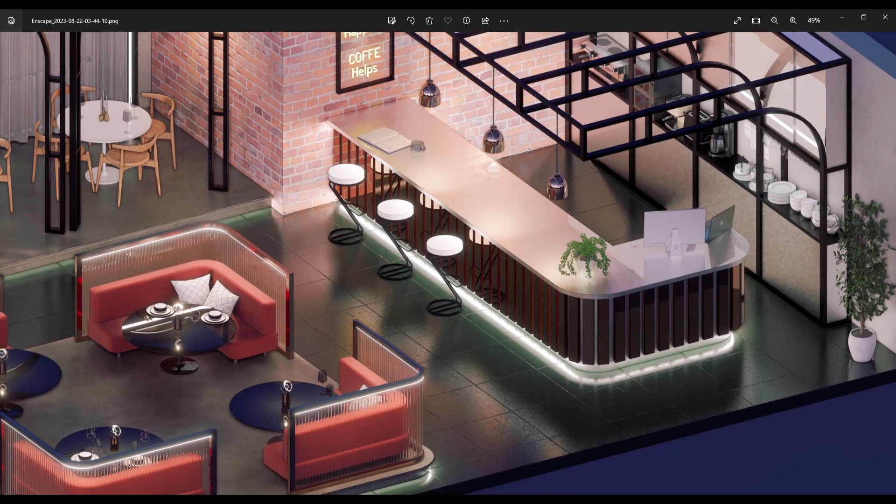The last tutorial was all about the modeling of this scene, and we created every detail, every part from scratch to this. Actually, I added some families and objects, and I'm going to give a quick update about them.

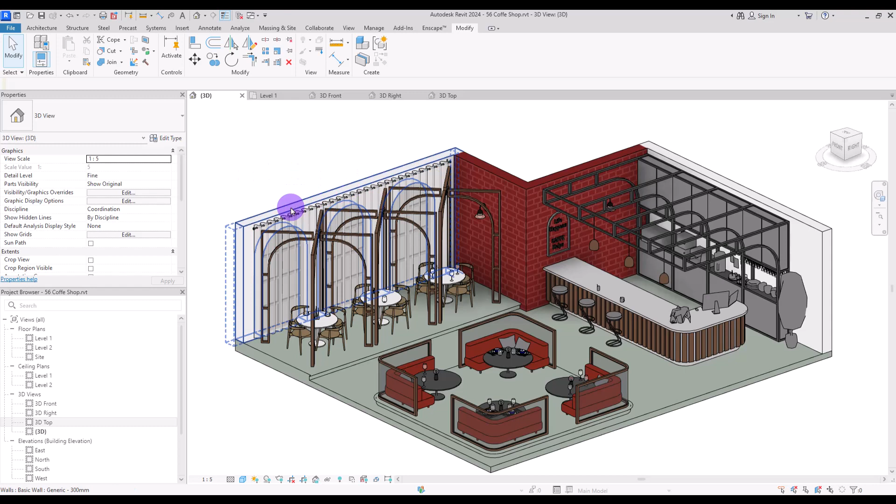First I added this curtain. I modeled it with a simple generic model and sweep blend, using a start and radius for all these parts. After that I created a void extrusion with a circle on top, and then with a revolve I created this rod.

Let's go to section box first. As you can see, I added these parts because I thought it was a little simple, and also I wanted it to match the frames in the bar section.

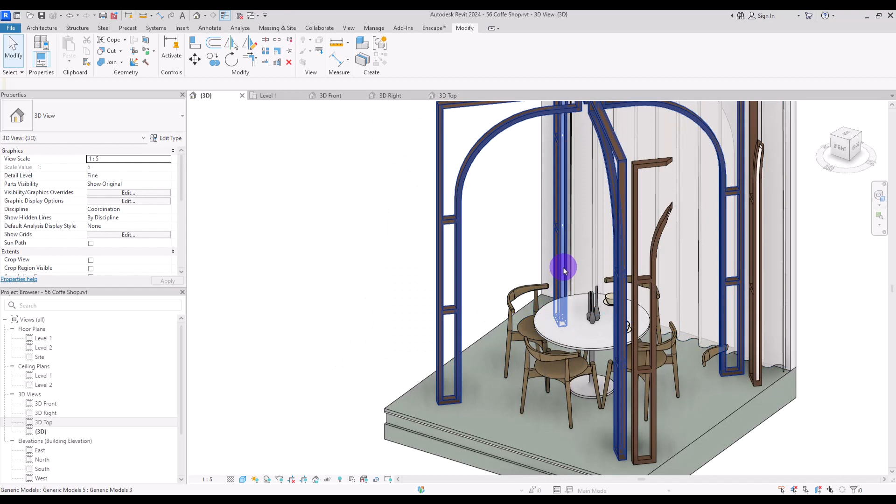I also added these lightings in this part. I created a void inside this part and then turned it into another geometry and added a lighting material. Nothing more in this part.

I just changed these chairs and added some dishes and glasses here.

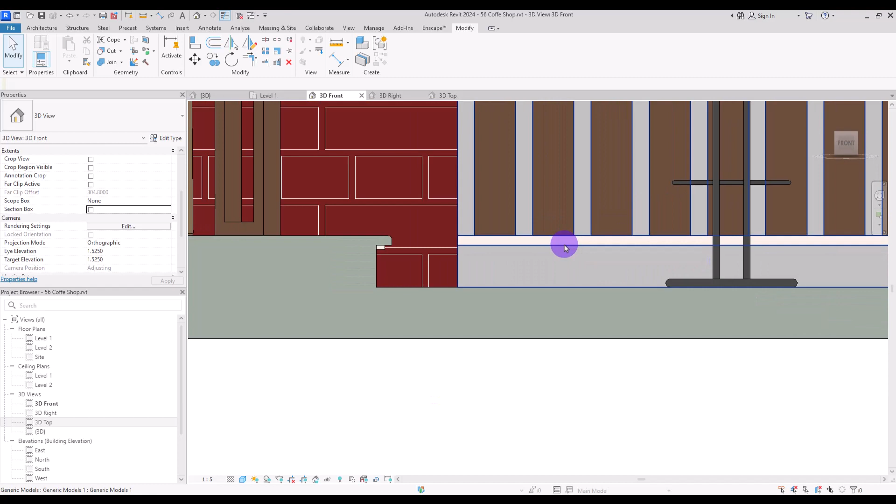If we look at this front view, you can see I added a nosing and lighting to this part with a very simple extrusion, and also for this part around this lounge, on the interior side of this partition, I added a very simple shape like this.

I actually copied this part onto itself and then turned it into a material. So if you select this, you can see this frame panel and this lighting here.

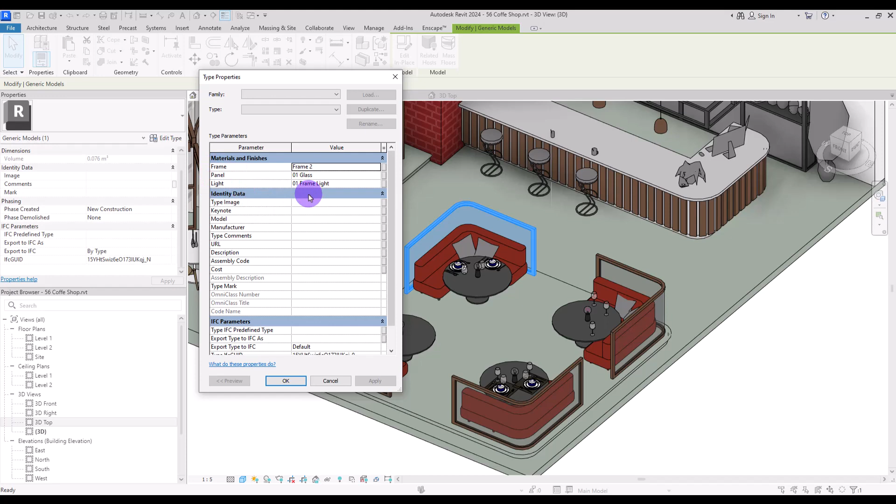We also have lights under this counter, and also under this part's top board, also under this frame here, and also under this part.

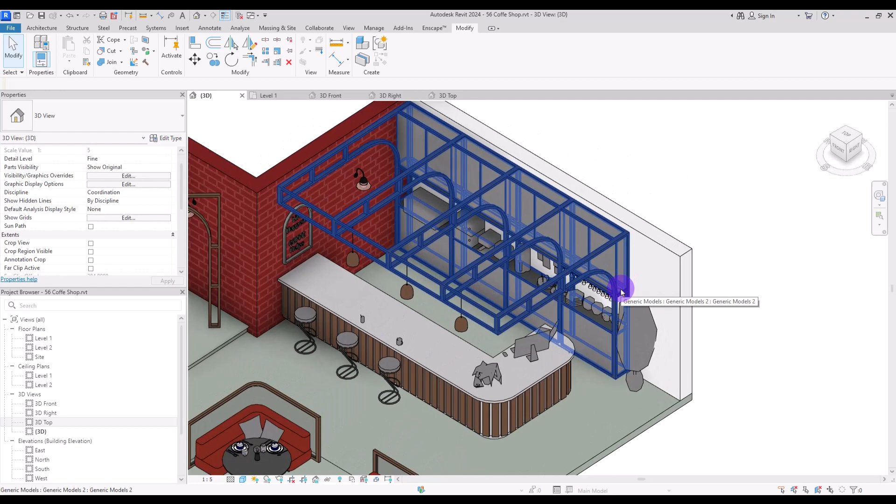I created some cabinets in these parts too, just to hide some space for things like dishes and equipment. All of these objects and families make our place a little bit messy, so I don't want it to be more than this. These are also too much.

This part is also new. I modeled this arch again with a generic model, and this part is a text. If you go to the architecture tab, you can model any text that you want with this model text tool.

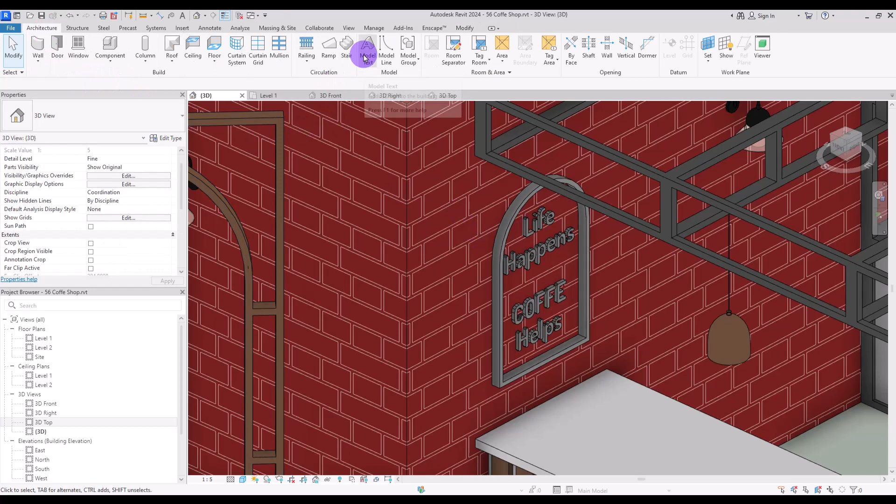These lightings are also new. I modeled them very quickly as lighting fixture families. If you want to learn more about creating lighting families, you can watch this video in the top right corner.

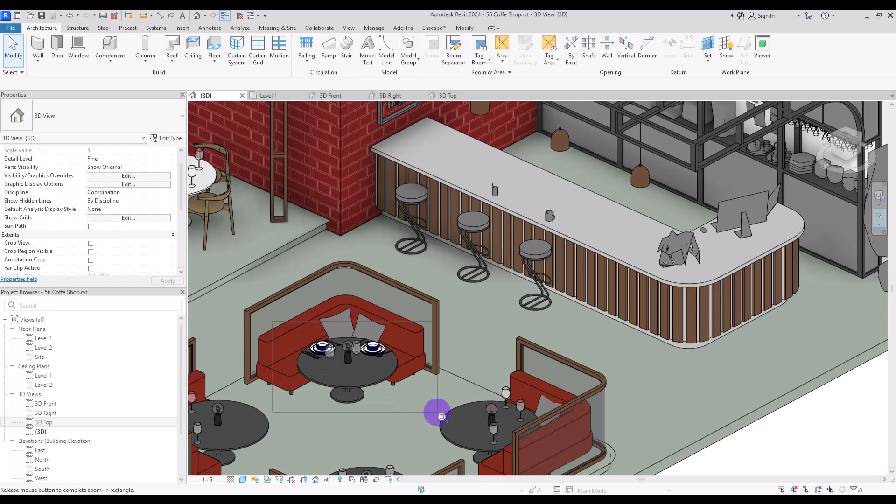If you select them, you can scroll down in this part and add whatever you want. You can add a placement fabric like this, and if you don't want these glasses, you can select another one. If you want, you can add a candle, and also hide this all and turn it into a wine glass simply.

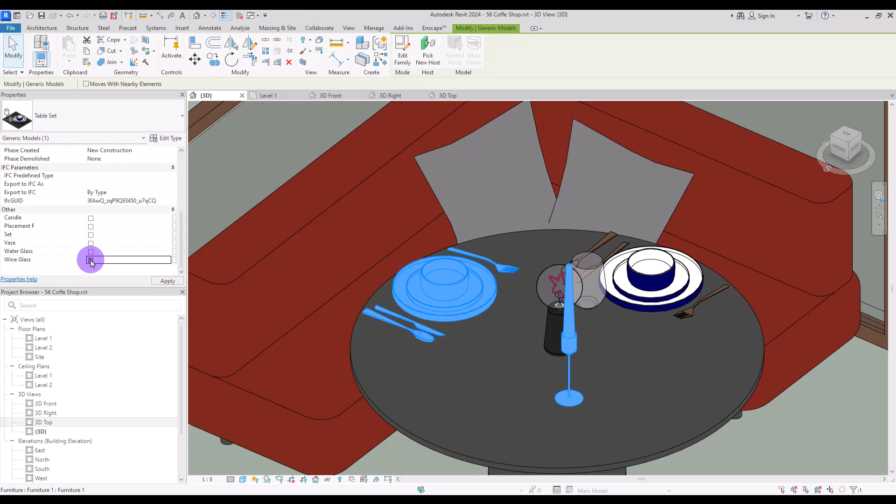Any other object or family that you see is for Enscape. So if you go to this tab and its asset library, you can select anything that you want.

You can also go to bimobject.com and search for whatever family or object you want, download them, and use them in your project.

Before we go back to Revit, let me show you ambientcg.com, where I download all of my textures from. If you go to all categories here, you can see every different type of material you need, so I download my textures from here.

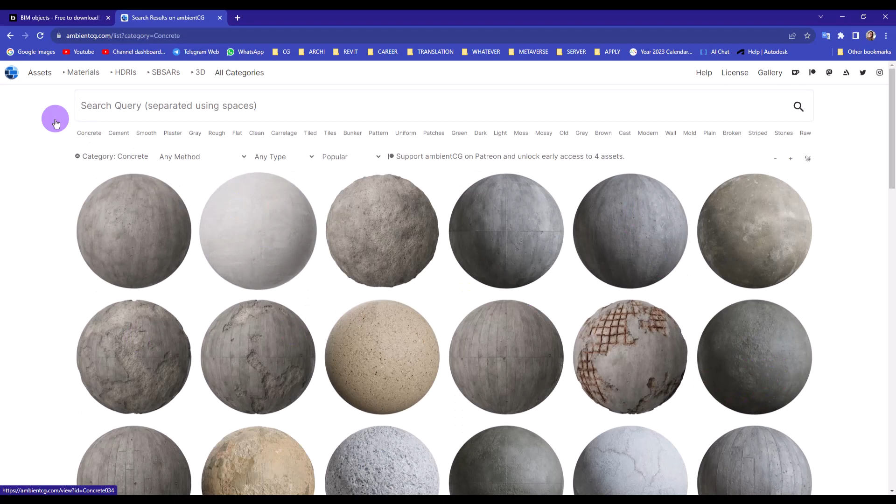For example, the brick I'm going to use is this one. The concrete I'm going to use is this one, or you can use this one or this if you want. Now let's go back to Revit and start with Enscape.

Okay, since this scene is going to be an isometric view like this and we didn't add any roof or ceiling for it, it's hard to work on it like this.

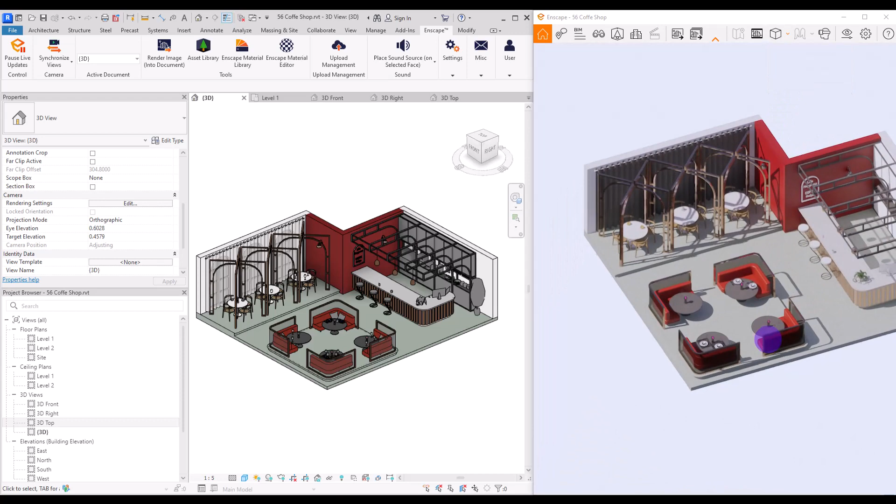First, we are going to change its view to this orthographic, and I also want to change it to night view, something like this.

Right now we don't have any sun or lighting in this environment, but we see these parts in white and it's a little bit unrealistic.

So if you want to fix it, you can go to your first level and add a floor, a generic model, or anything you want under your floor, and make it very large so it covers all of these parts.

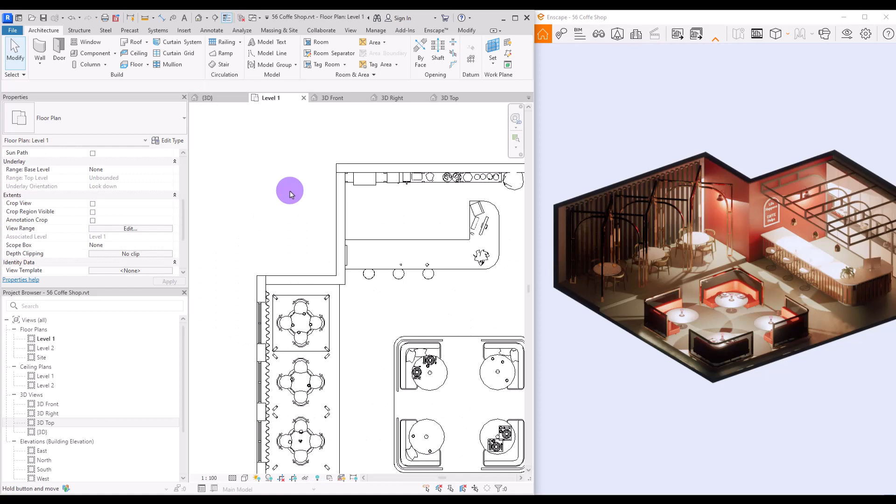Cool, now let's move on to the material part. As I said, lighting plays a very important role when it comes to creating material. It affects everything—its color, its bumps and displacements, and also its reflection.

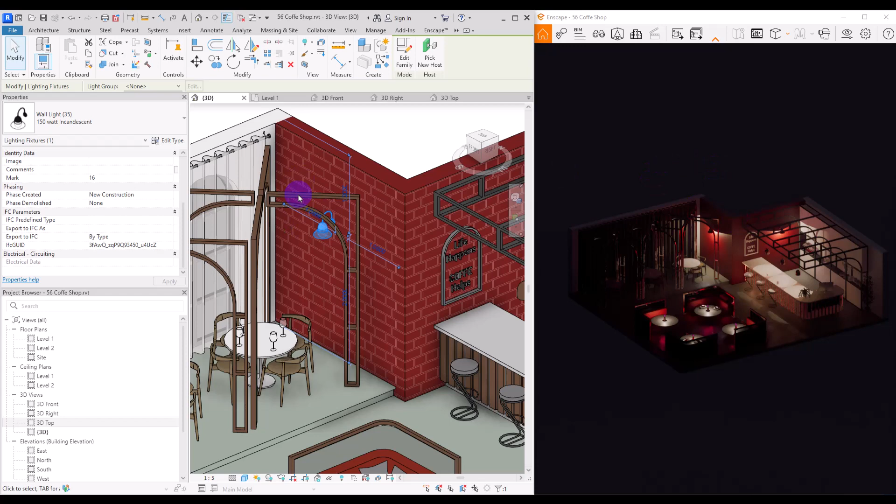So let's first control the lighting. For all of those lightings that I added to all of these frames under this part, under the counter and to this partition, I created one material.

So if you select them, you can go to its edit type, and it's this frame light. For this part also we have the same one. Again, it's the same for this part and also for this part.

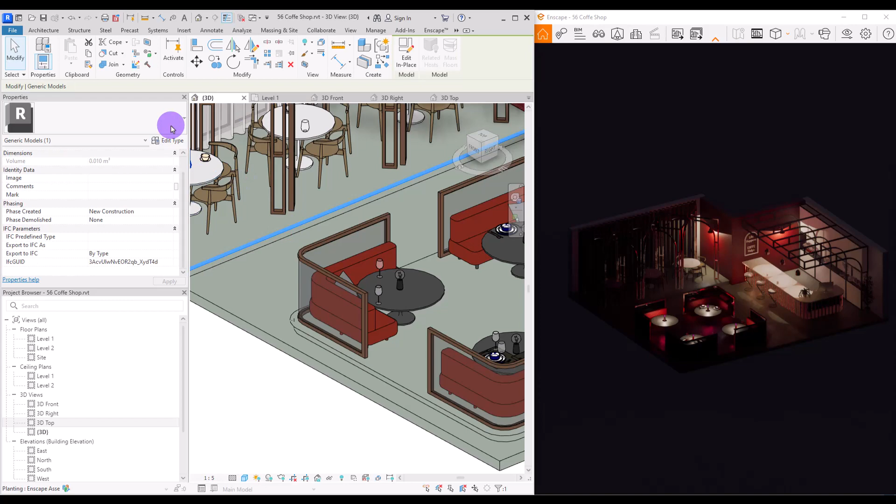So I'm going to go to manage and material. If you select it, you can go to this browser, and if you scroll down a little bit, you will find these lightings. You can select either one of them. Now go to its appearance, and here you can change its color if you want. You can change its emission and also its highlight from this part. For now, let's see how it will look.

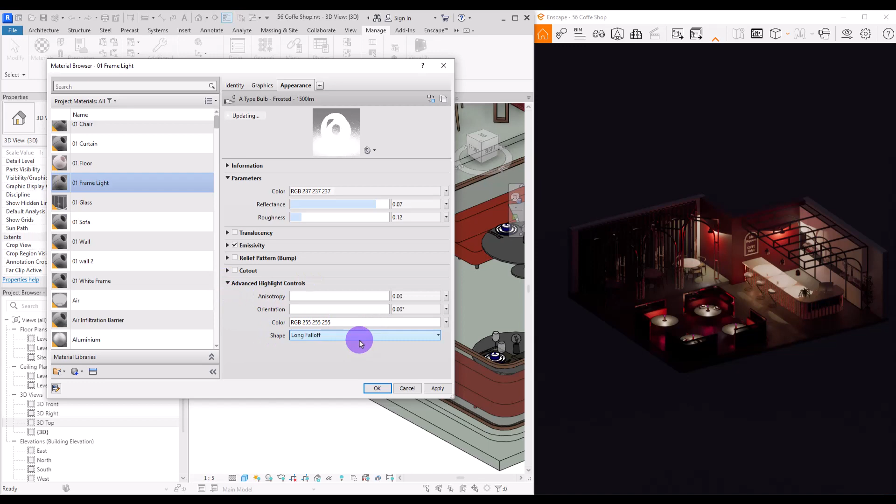It is too much. Let's go back there and decrease this luminance. I'm going to put it on 200. Okay, let's go with this one.

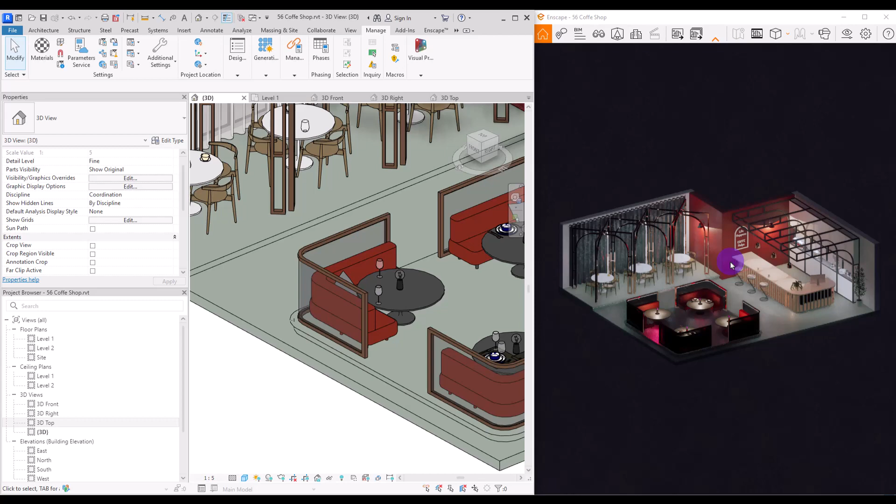In this scene, as you can see, it's a bit messy, so we need to be careful with our material. We should control the texture so we don't make it worse. I'm going to use only 2 textures for pattern, and even 2 is too much, so we need to use that texture carefully. I'm going to use one of them for this brick wall here.

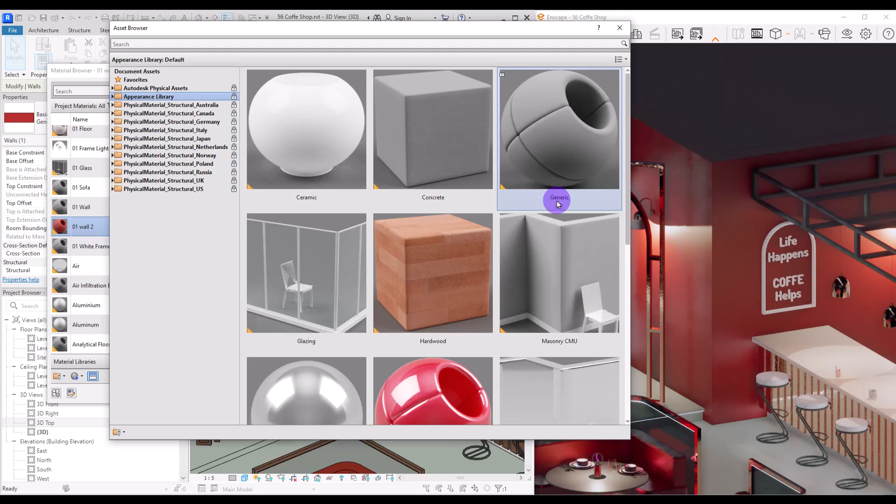Select the wall and go to its edit type. Go to edit, and in this part you can change its material. Let me first change it to a generic material like this, with no color and nothing else.

Now the first thing we need to do is add our image. Click on this part and select it. I'm going to use brick number 77, and for its color we need to use this color texture. In its setting, I'm going to change its size to 1:2.

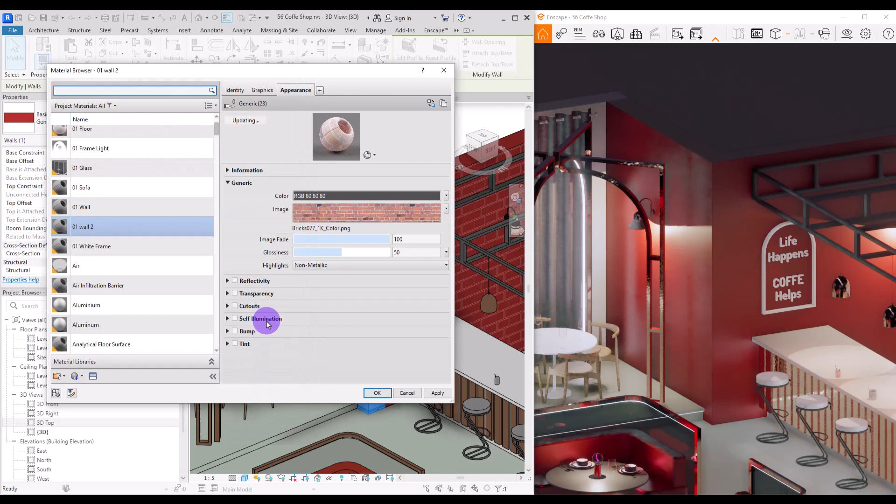It's good, I think it's good, but I want it to be a little bit more, so I'm going to change it to 3:1.5. I also want it to be a little bit darker.

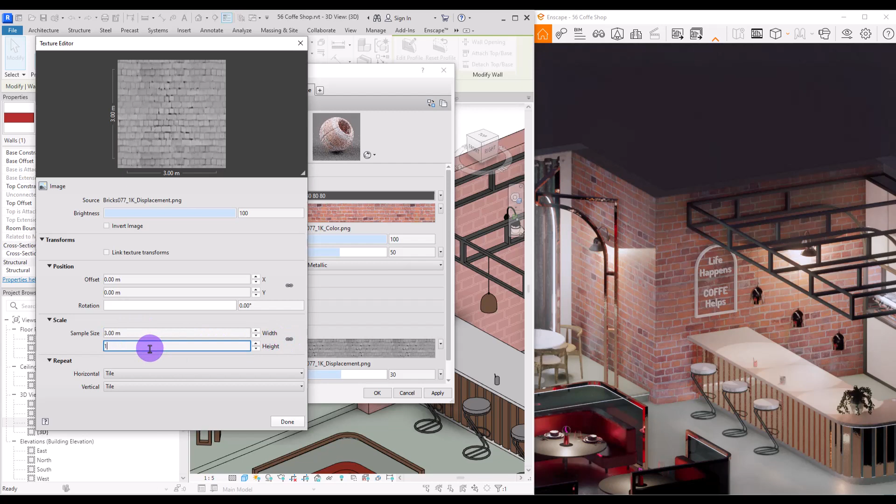Check this bump and add the bump or displacement texture. It's this one, and in this texture editor setting, you need to give it the same size, 3:1.5, and increase its amount from this part.

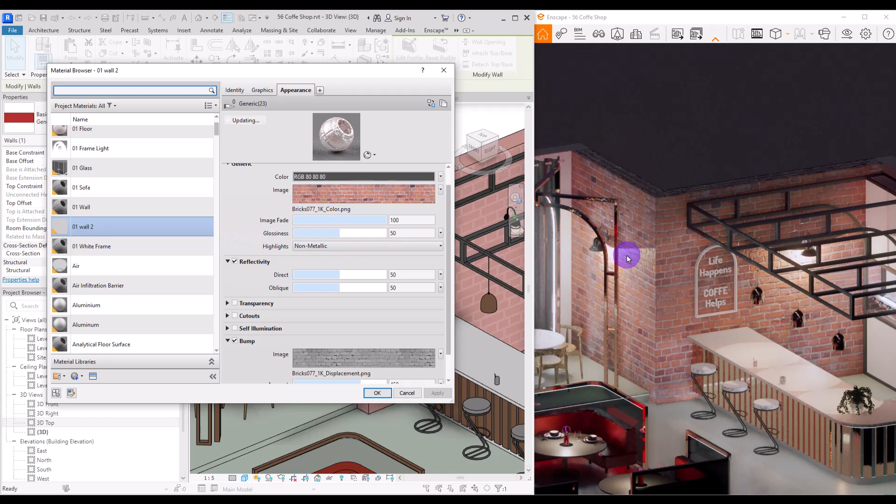I'm going to check this reflectivity too, to add a little bit of reflection. Brick is a material that needs no reflection, and actually it has no reflection, but in the real world we don't have any material with no reflection. Even if it's very low, you need to check it. If you want it to be less than this, you need to decrease this glossiness, and you see its effect here. I think it's good enough for now.

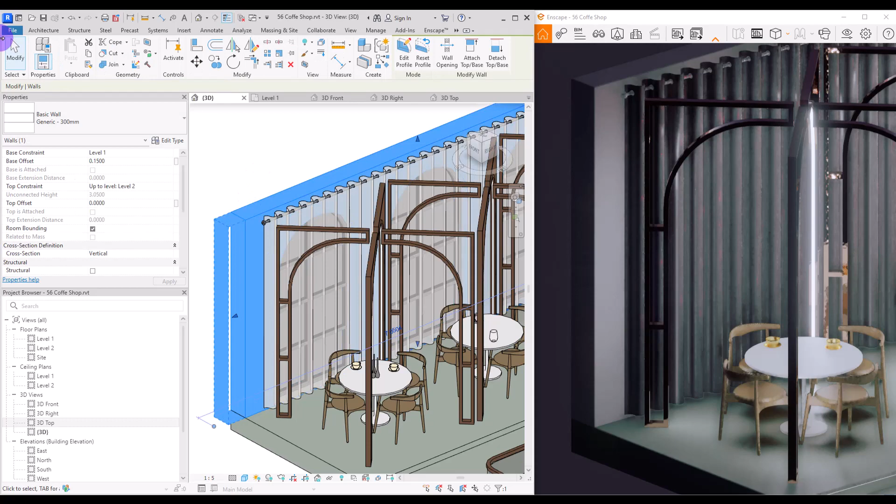The next material is going to be our wall in this part and also in this part. So you can go with plaster or concrete. I'm going to go with the second one. Select your wall and go to its edit type. Go to edit, and this is our wall number 1. The brick was wall 2, and this is wall number 1, or actually it has no number.

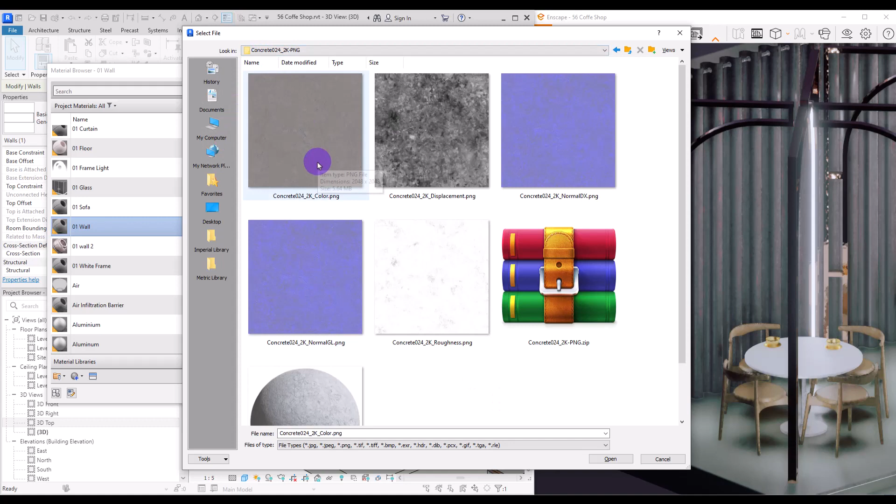So first I'm going to assign a default material for it, and then select its texture. It's concrete number 24, and for its main texture we need to select this color one. If it's too much, you can change it in Photoshop and then use it here. You can also change this color to something white, something like this, and then decrease this number so they mix together and give you something lighter.

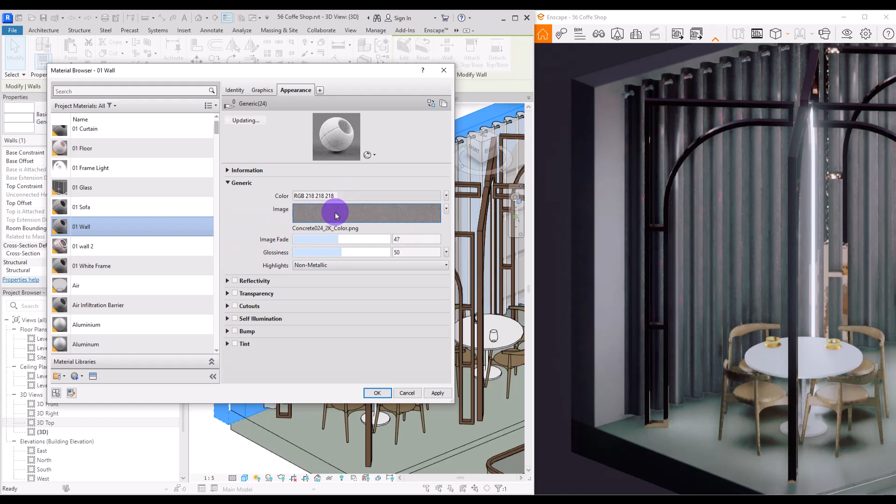In its setting, I'm going to change it to 2 for both of them, and let's apply and see how it looks first. I'm going to increase this number a little bit more, to 6. I think it's better; we can see at least these textures here, and then I'm going to give this bump texture for it.

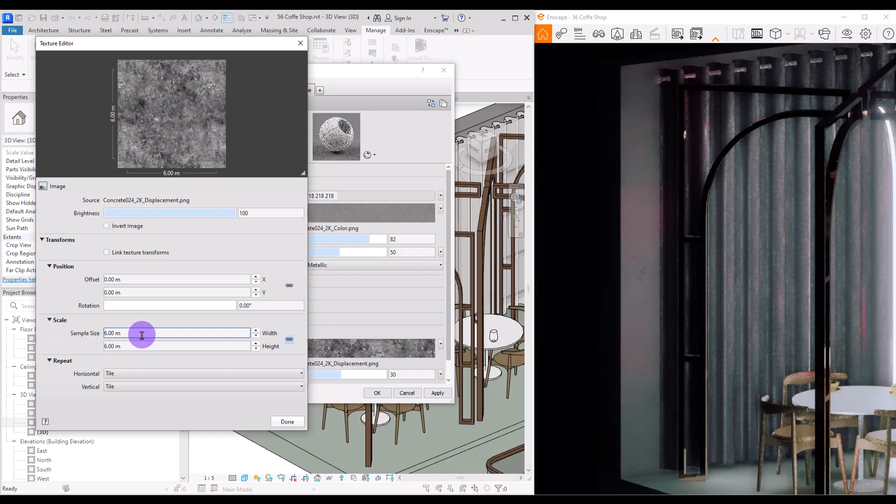We need to select this displacement, and in its setting we need to insert the same number for its size. Let's change its amount to 15. I also want to check this reflectivity and increase its glossiness so we have a little bit more reflection than this brick. The next material we are going to work on is the floor.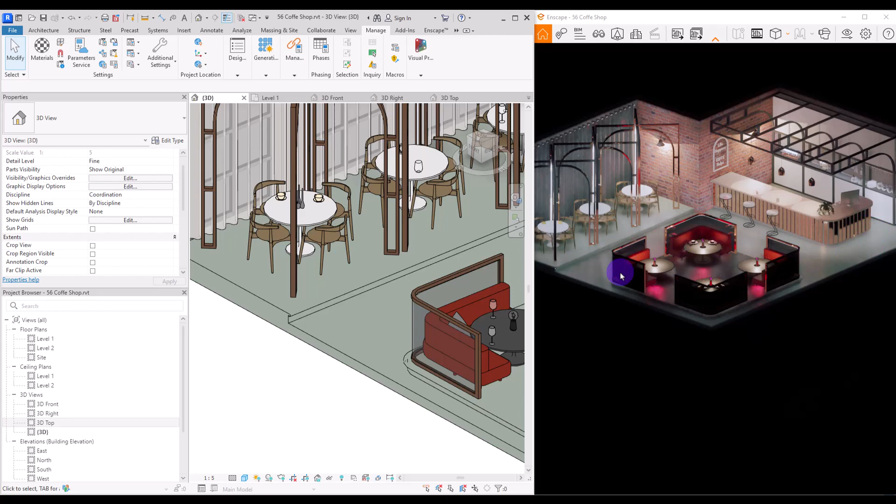I'm going to divide the floor into two different materials. For example, we can use one material for this part and another one for this part and also here. Since they are both the same type, we need to select it and go to its edit type. In here, we are going to duplicate it and change its name if you want, then go to its edit type, select its material, and let's simply create a new one.

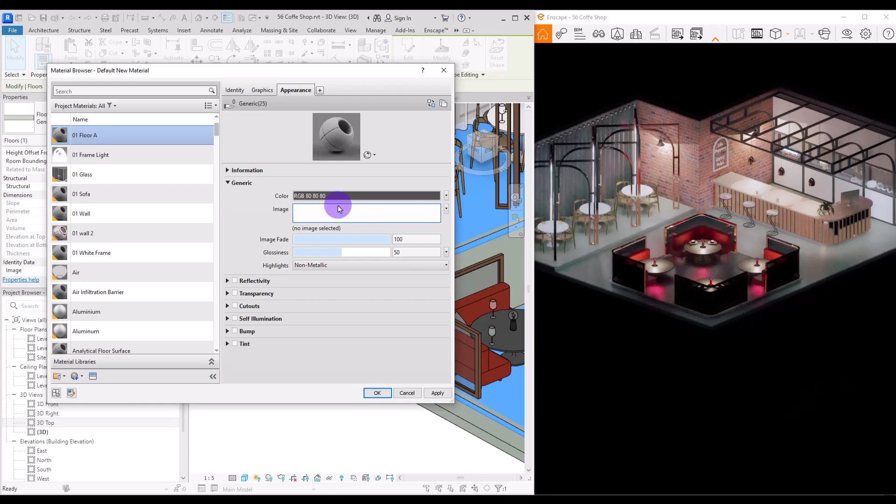Change its name to, for example, floor A. I don't want this part to have that much texture and so much reflection. You can use marble or concrete simply for this part, but I'm going to again use concrete number 32. Select this one for its color. In its setting, I'm going to change its size to 4, and let's apply.

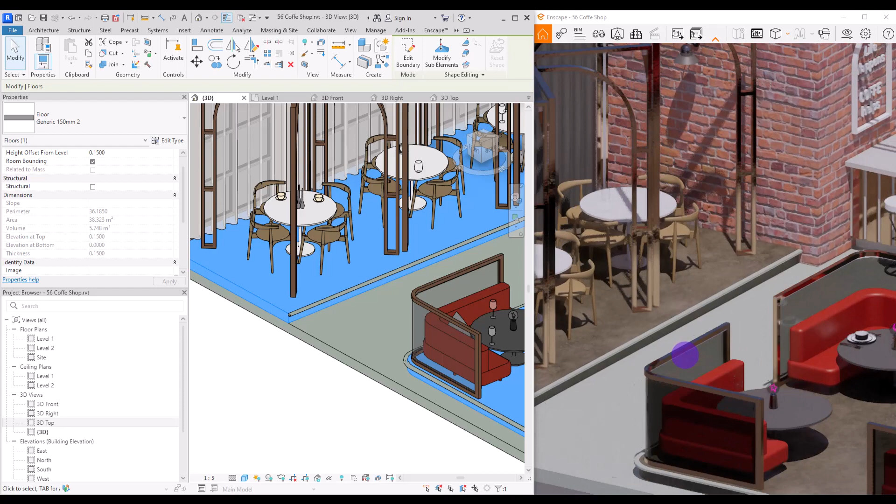If you look at it under the sun, it's something like this in this part and also here, and I think it looks good. However, I'm going to make it a little bit lighter. So change this color to something like this, and decrease this image fade.

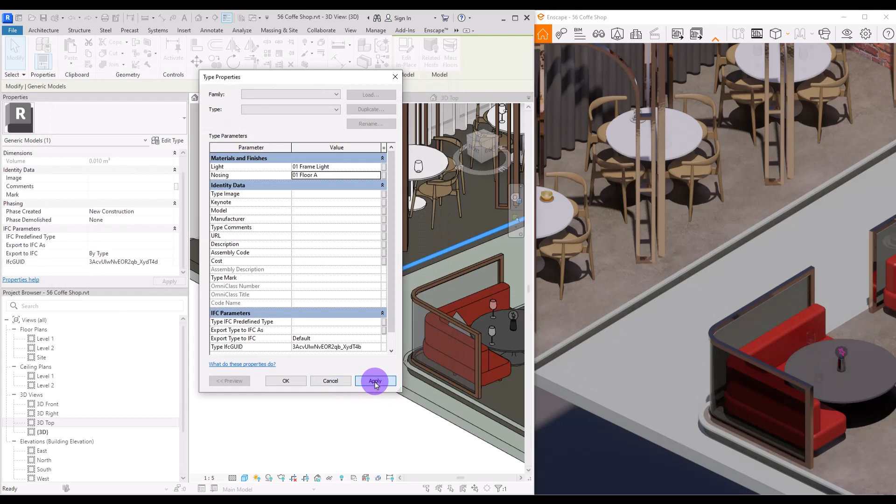For this part and also this part, we're going to use the same material. I'm going to click on this generic model, and in its edit type for this nosing, I'm going to select this floor A. Now it's time for the other floor.

Let's select it and go to its edit type. First we are going to assign a texture for it. I want to add the second textures material for this floor. I think it will be cool if we make it very reflective, since we don't have that much reflect in this scene.

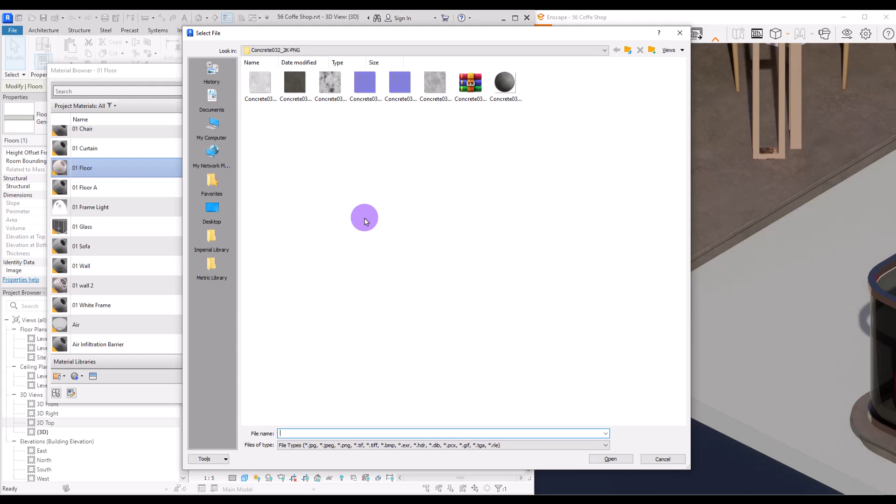It is this one. You can find it in Arroway textures in the concrete section. For now, I want to change its size to 4.

As I said, I want it to be very reflective, so I'm going to check this box and increase its glossiness. Also we need to check this bump and add its bump texture, which is this one. Increase its amount too, and let's apply.

Oh, it's too much. Okay, 1.5 it is, and I also want to change its color to that darker one, this one. Another thing that I want for this material is for it to be a little bit green.

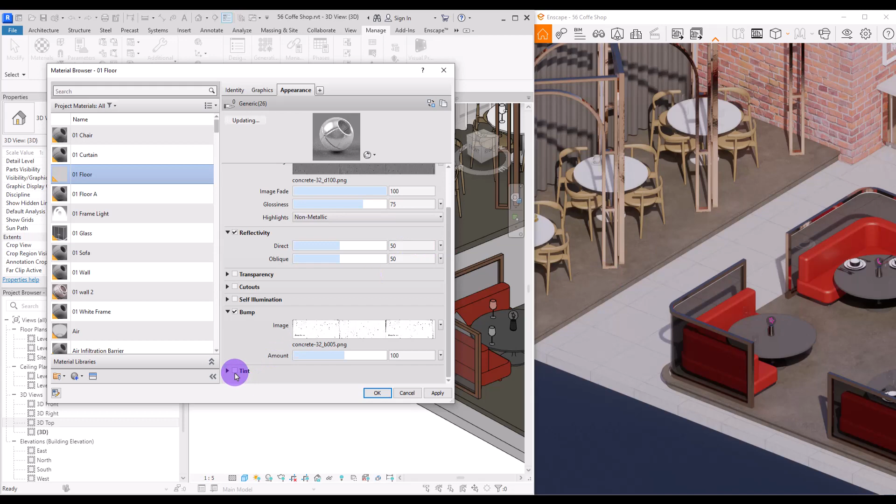You have a lot of red color, red texture in this scene, and I want some balance in here. So I'm going to check this tint and add a very dark green color, something like this to it. And I'm going to increase its glossiness too.

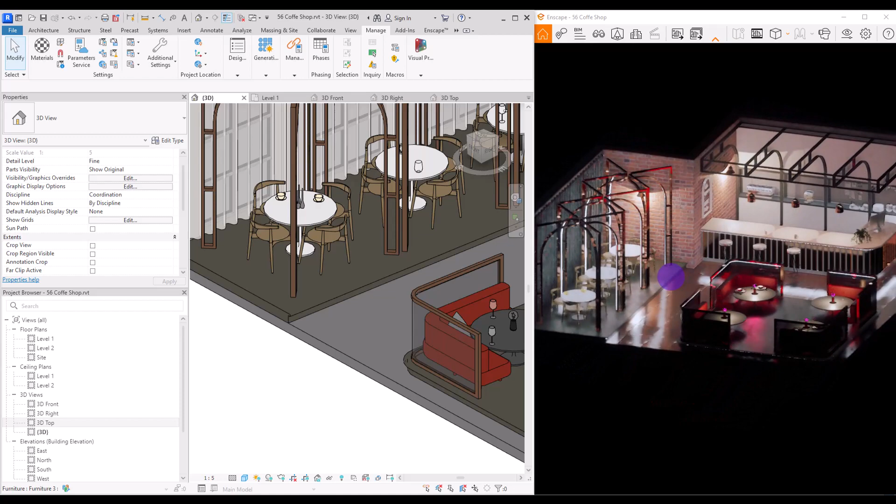Now let's decrease this lighting and look at it from a distance. If you see too much noise and it's not that high quality, it's because the size of this render is 2000, which is a little bit low.

So if you increase this number and actually render it, it will be much better in the final render. So don't worry if you are watching it like this.

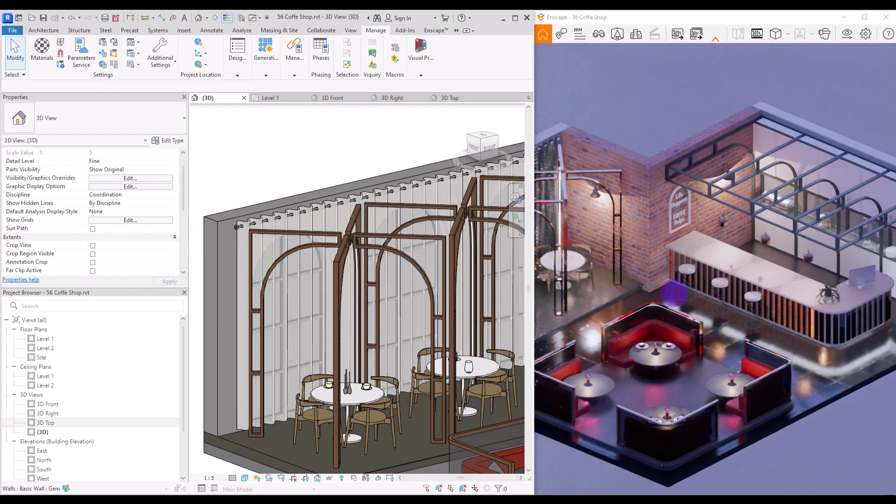Perfect. Let's move on to the next material, which is this curtain in here. Select it and go to its edit type. In this material, I'm going to go to the asset browser, and in the fabric section, if you scroll down, you will find this one or this.

Select it and let's go to its setting.

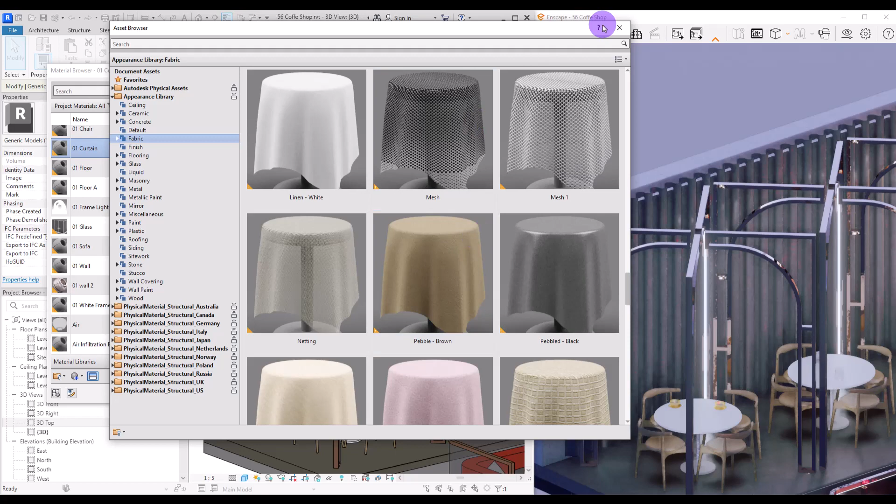I don't want its color to be like this, so I'm going to change this to white, and I'm going to remove its image, but I'm going to use this cutout for its texture. If you want, you can check reflectivity and add that cutout to this bump too.

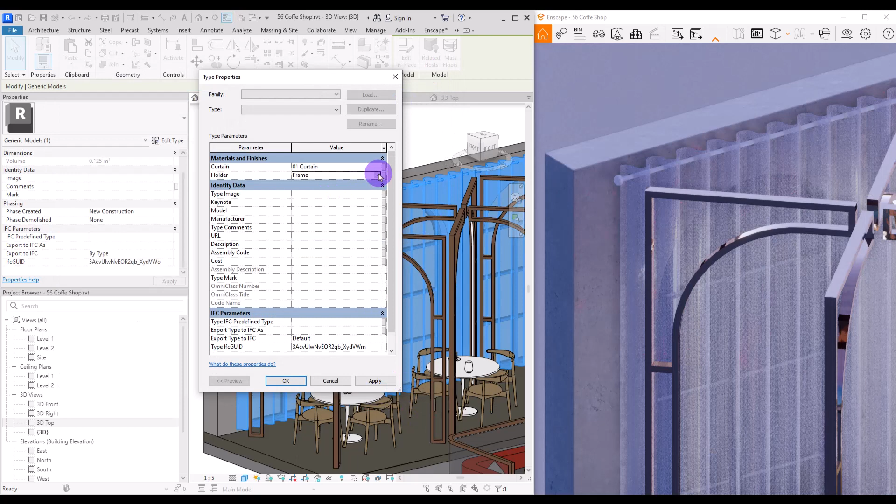Apply and okay. For the top part, let's create a new material which we are going to call simply metal 00 metal, just to have it above all of those materials.

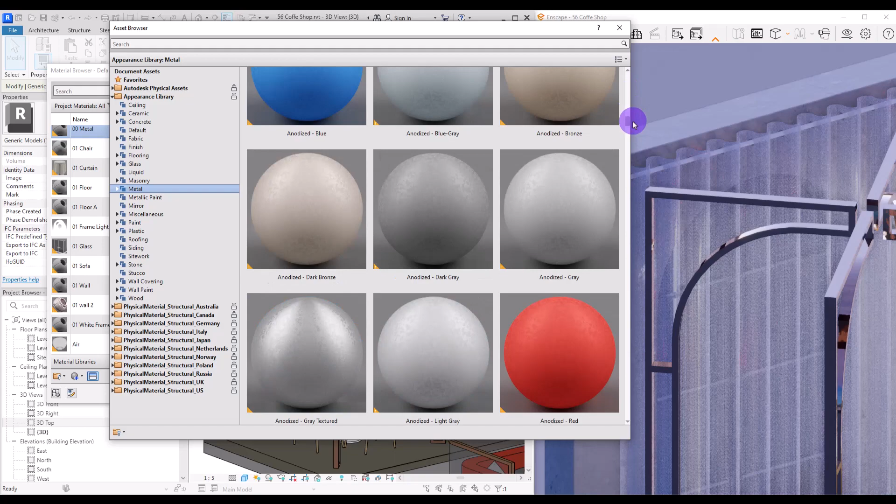Let's go to the asset browser, and in the metal section, you can select any kind of metal that you want. I want to go with this one, but I'm going to change its color to something a little bit lighter. Okay.

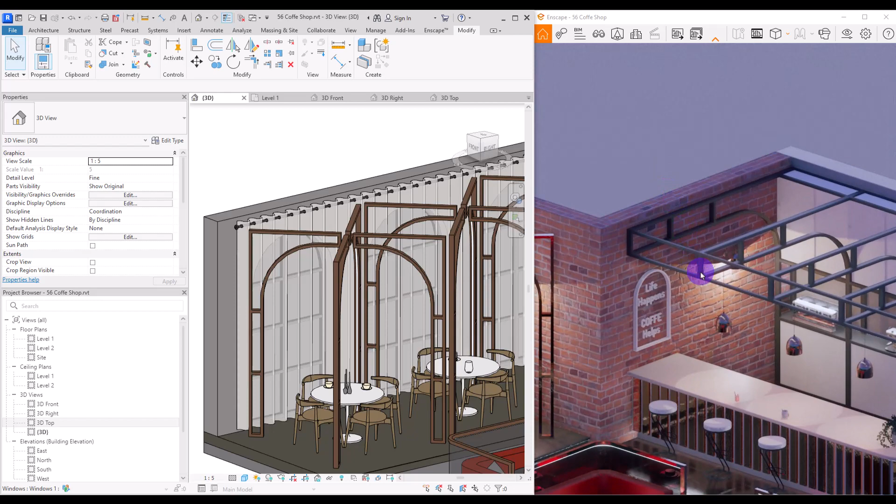The next important material which we have in here is all of these frames. I want this part and this part to be black, and in this part we can use another color. So let's start with this part. Select it, and in its edit type you can change its frame.

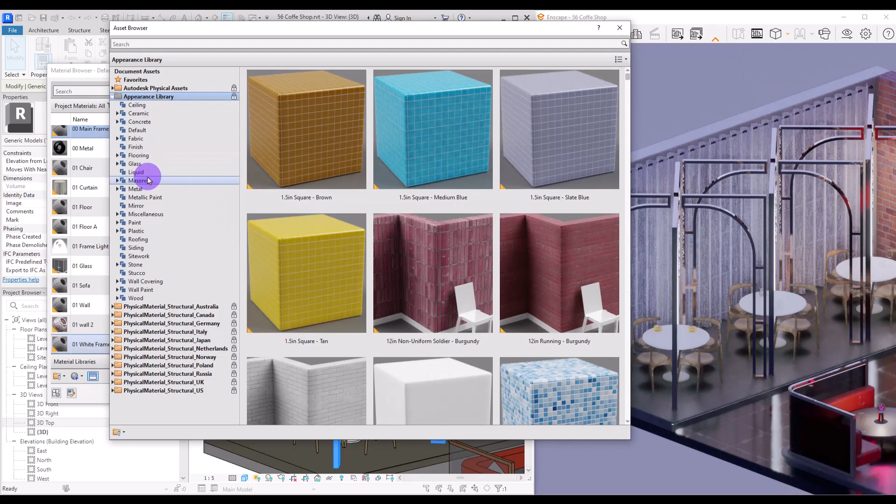Go to its material and create a new material for it. Change its name to main frame. I really love all of the metal materials in here, so I never felt like I need to create any metal material from scratch. I always use one of these.

You can again use this one, or if you want it to be more reflective, you can use this chrome black. I want to use this, but I'm going to change its color to something darker, like this.

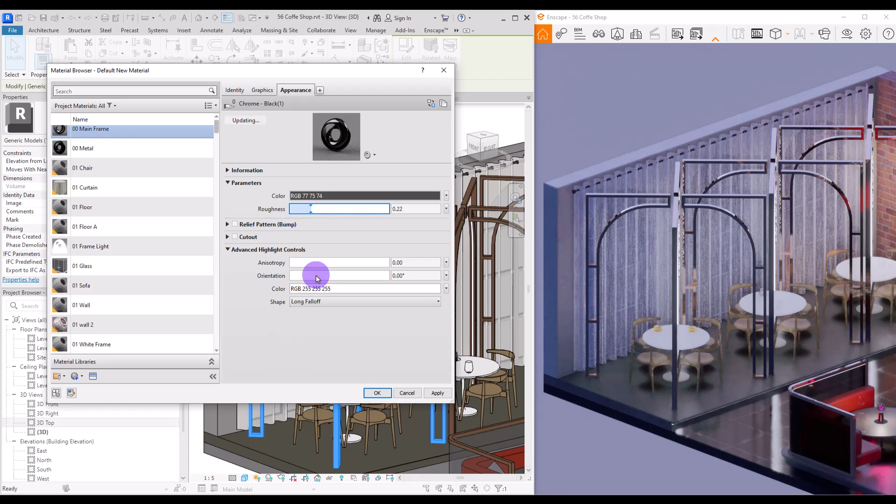I also want to change its roughness to have a little bit less reflection. Now I'm going to use it for these parts and also for this frame. This one also needs the same material too.

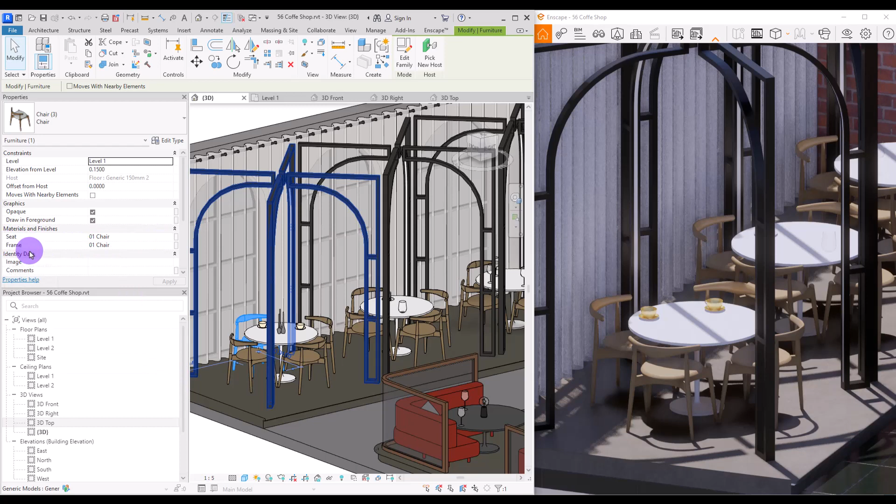Okay, the last thing in this part is this table and all of these chairs. If you select this chair, you can find the seat and frame material in here. I'm going to create a new one. Let's call it chair and go to its appearance.

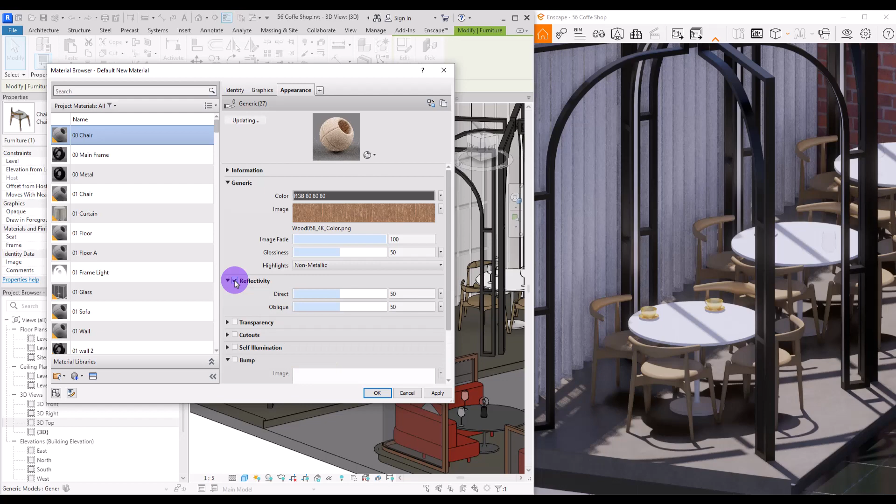For its texture, I will use this wood texture. It's a very good high quality texture and it will look so good everywhere. Change its size to 1 by 1 for now. Check this reflectivity and also give it a bump texture.

I think we need to rotate it. Go to image setting, and with this option here, rotate it 90 degrees and do the same for bumps too.

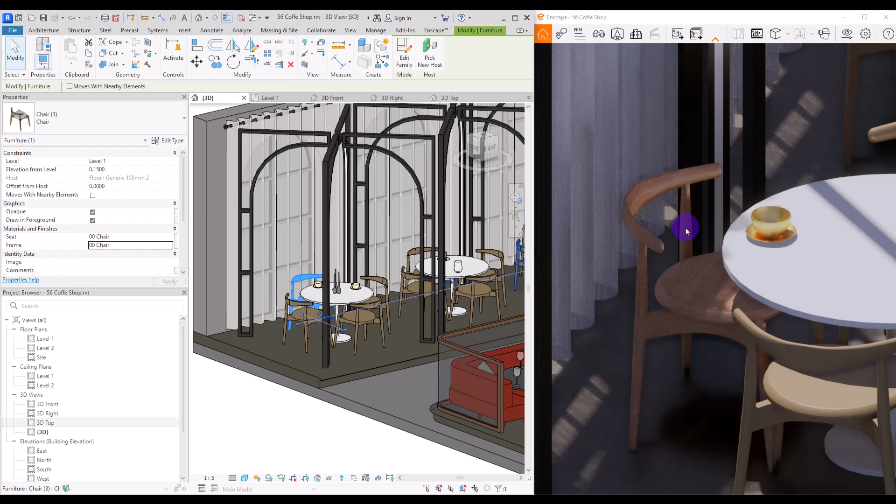It's much better, but I think we need to use two different textures with different rotations for this object. So I'm going to go to this frame part, this second one, and duplicate this material.

And rotate its texture. Perfect. I think we are done in this part.

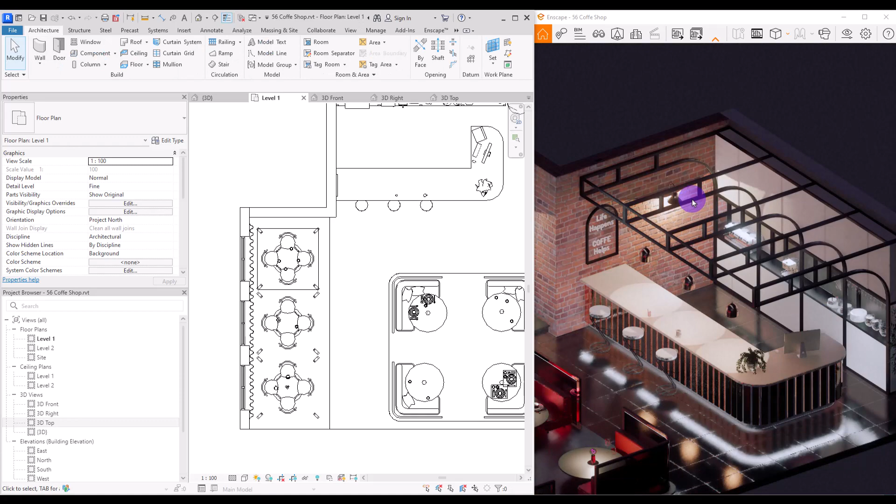Now it's time for this bar part. We changed these frames before. Now I'm going to change these cabinets. So if you select it and go to its edit type, you can see it in here.

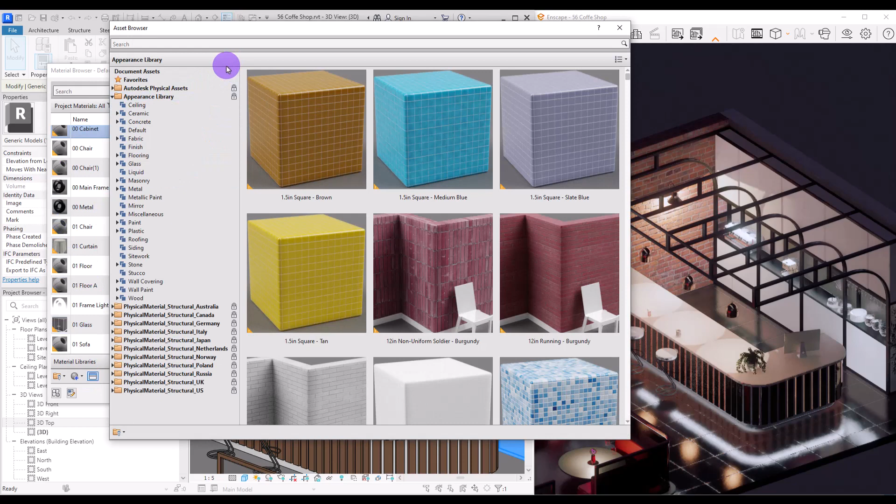Click on this part and let's create a new material for it. Change its name to cabinet and go to this asset browser. I want it to have a little bit of glossiness, like a high gloss cabinet, so I'm going to go to this metallic paint.

One with light color and high reflects, probably something like this or this one. Let's select this one. Apply and OK.

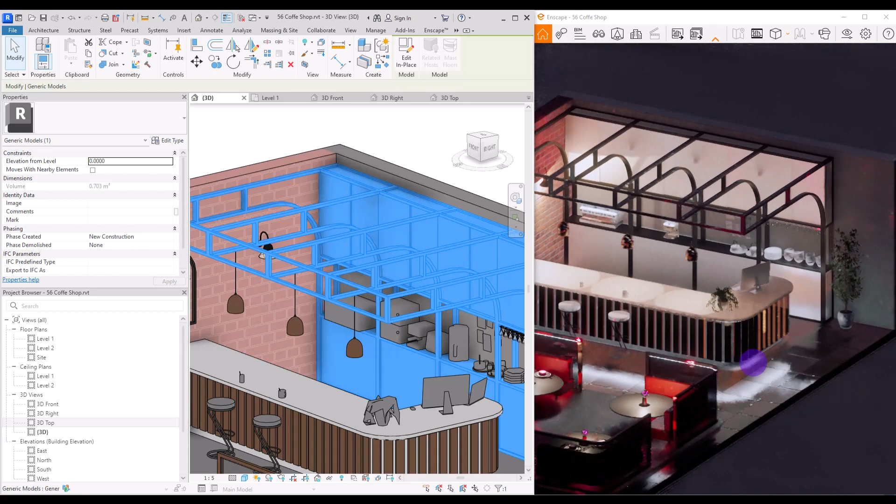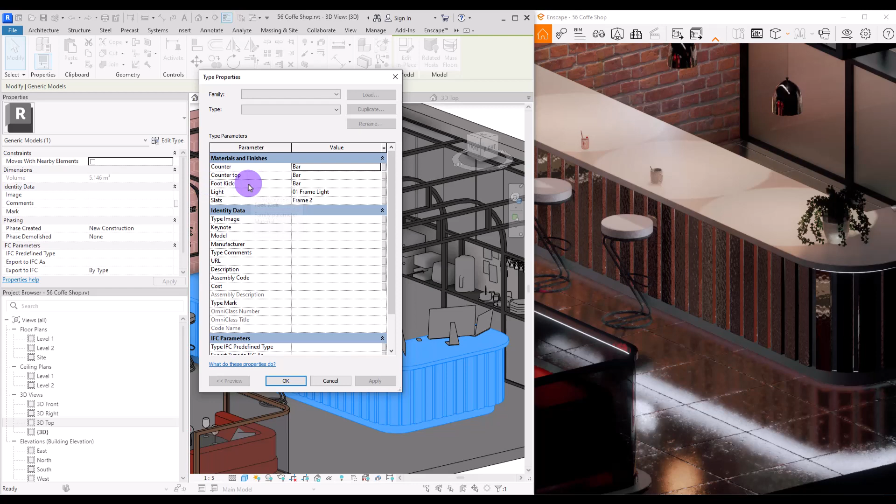Next part is this counter. I am going to use the same material as these cabinets for this part and also this part, because I think these parts need to be a little bit reflective. Select it and go to its edit type, and for this countertop and for this foot kick (toe kick), we are going to use the same cabinet material.

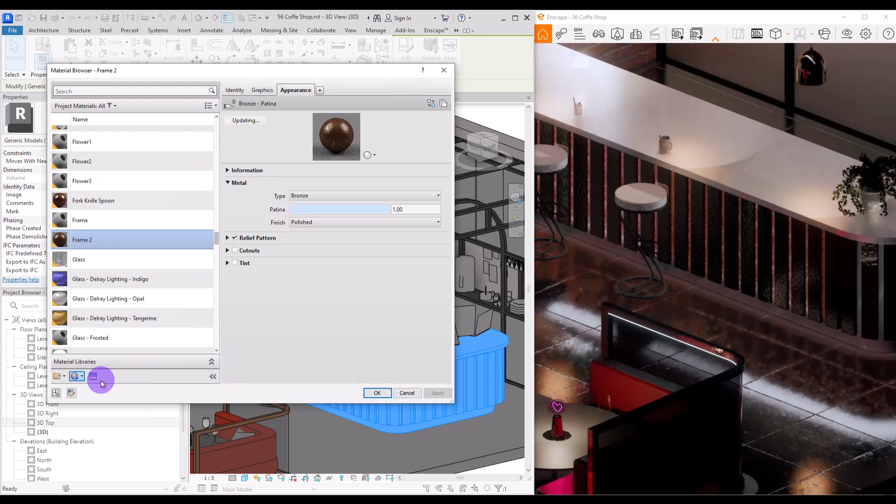For these slots, I think it will be good if we use mirror. Select it and go to its edit type, and in this part we are going to create a new material which we can call mirror. Search mirror and let's use this one.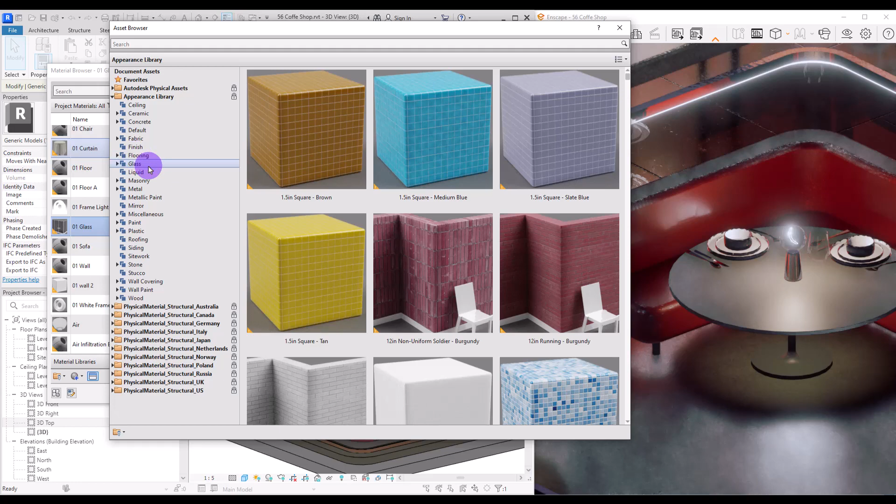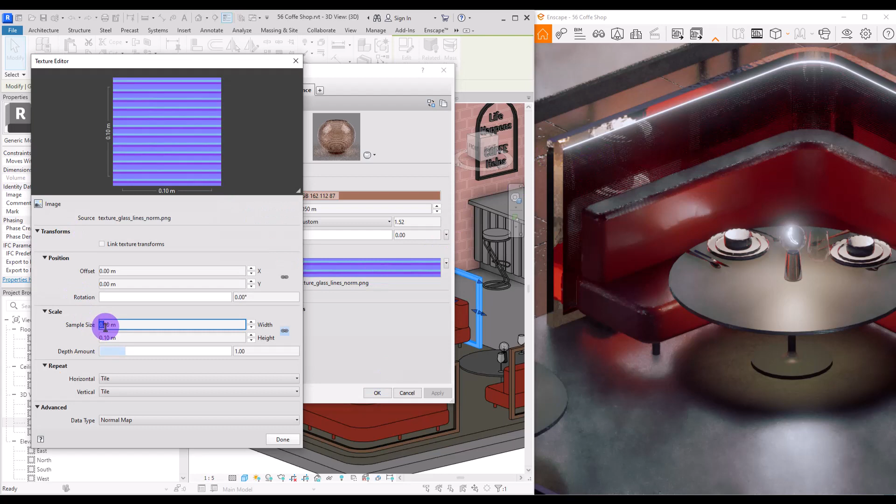Now let's move on to this private part. One thing I want to change for sure is the glass of this partition. Select it and go to this panel part. For this material, I'm going to go to the glass section. If you scroll down, you'll find this glass. I want to change its color to something a little bit darker, something like this, but browns. If you go to this bump part, you can select its texture and increase its size. Let's test this for now. Yes, I want it to be a little bit more, so I'm going to double it.

For this sofa, I want to create a fabric material, so select it and go to its settings. Select the sofa and give it a new generic material. For its texture image, I'm going to use this texture, number 26, which you can download from Ambient CG.

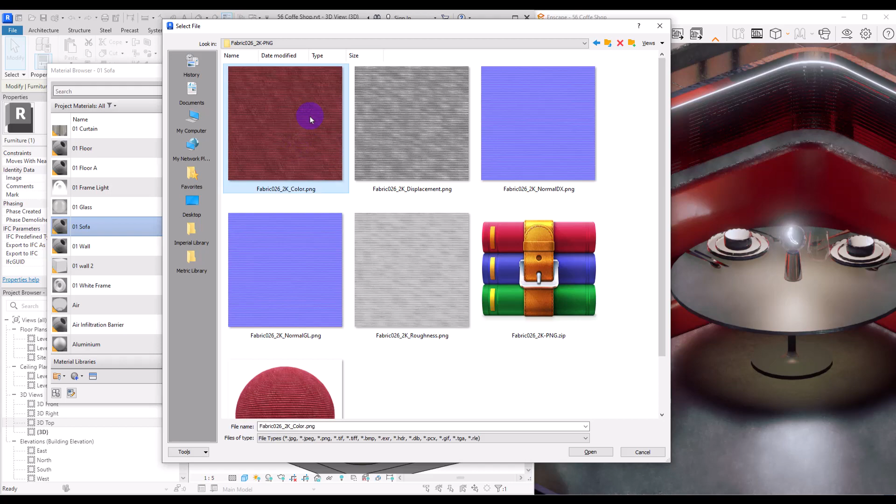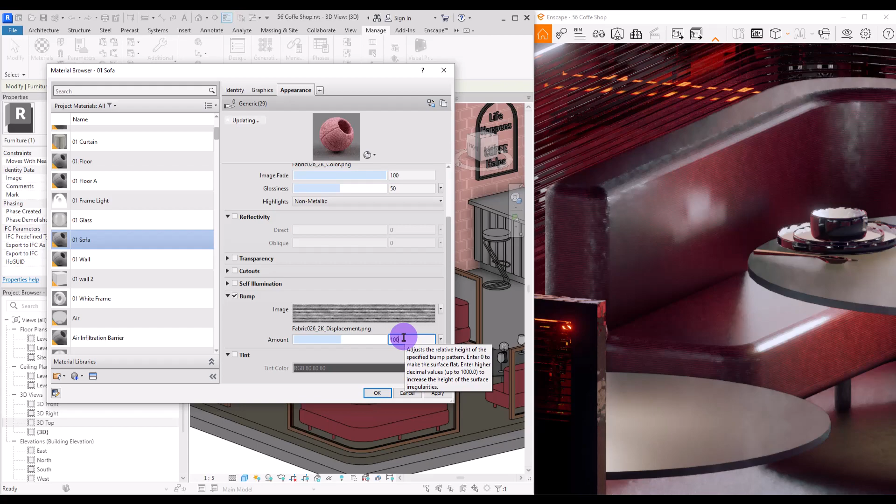I selected it before deciding about the glass behind it, and I don't think they match together that well, so let's just use this one for now, and after that we can rotate this one. Check this bump and select its bump texture, displacement texture actually. I want it to be a little bit more, something probably 15, and also I want its amount to be around 100, for example.

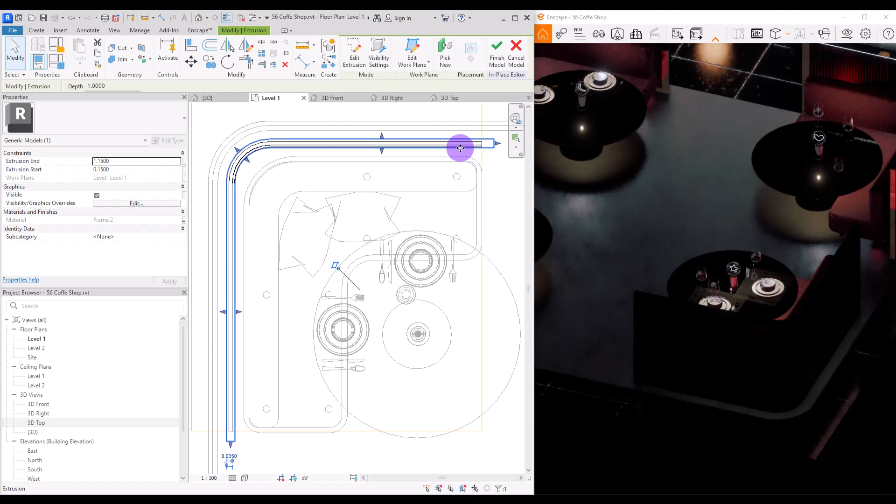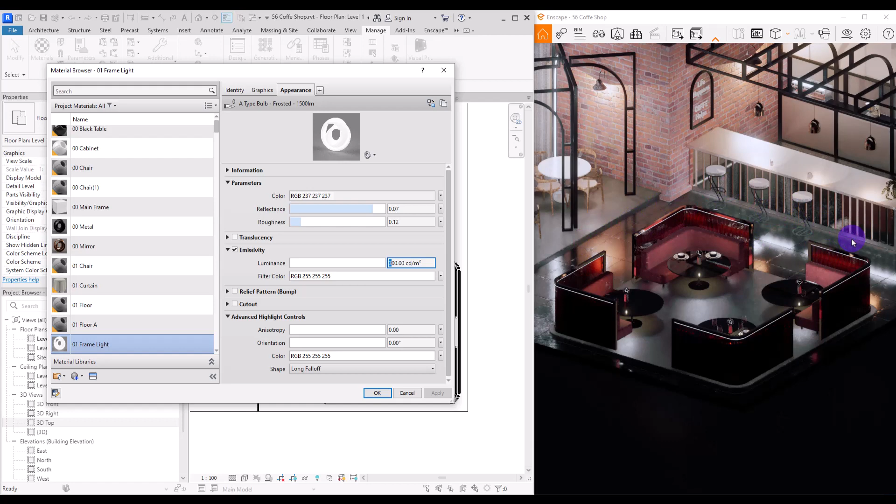Also, behind this partition, it's very dark. Remember I put this lighting on one side of the partition. So we can go to its family, and if we put it on wireframe, we can see it in this part. Copy it on itself and move it from this point to the other side of this glass. We probably need different lights in different parts to separate the lighting. For example, I think we need more lighting in this part, but if we increase it, it will burn in these areas. We also need more lighting here, but not that much in this part. So in the end, we might need to separate these lightings.

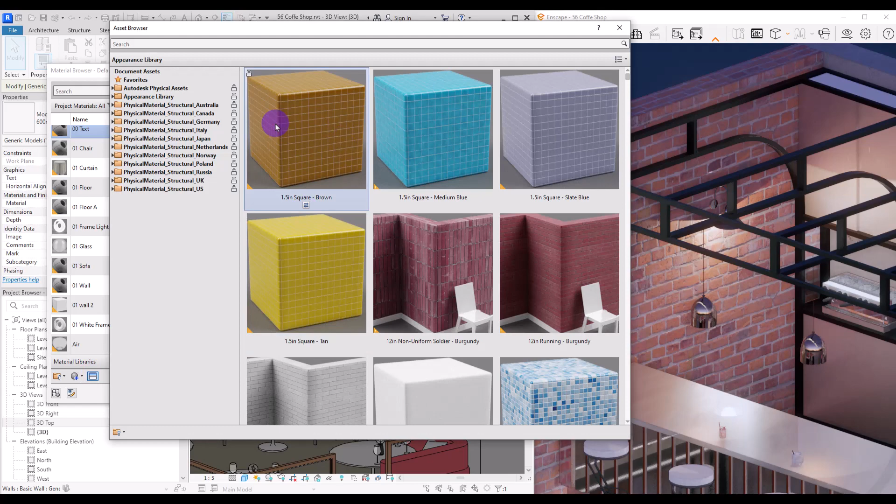For this text, I want to turn it into something glowing like those neon texts. Let's select it; you can change its material from here. Create a new one for it, and from this asset browser, scroll down a little and select one of these. I'm going to change its color to something warmer, and also change its filter color to the same one and apply.

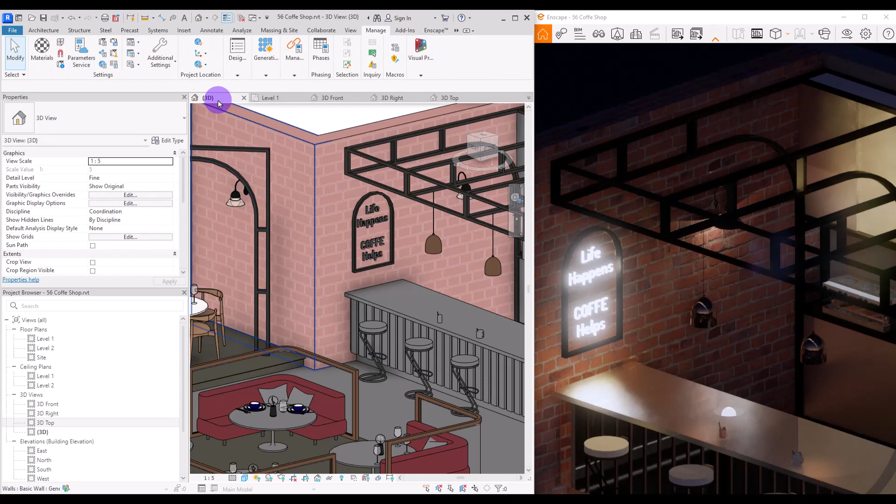As always, it's too much. Controlling lights in these kinds of scenes is very important, so I'm going to change it to 500.

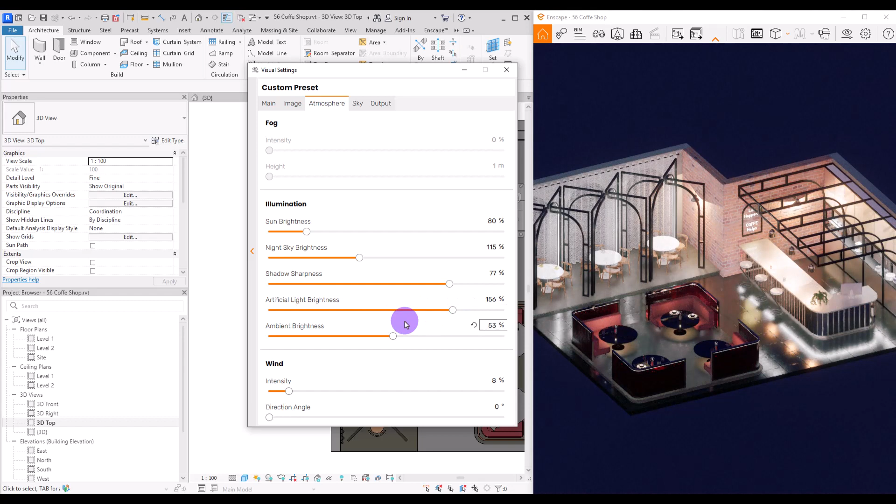Okay, I think we've covered everything now. The final part is the render setting. Go to visual settings and then the atmosphere tab. Here, I'm going to increase the artificial light brightness a little more, and also the ambient brightness. Then go to output and increase this to 4000, 3000, as much as you can. Since this is a night render, it needs lots of quality and resolution, so if you want to export the best image, you need to increase this part as much as possible.

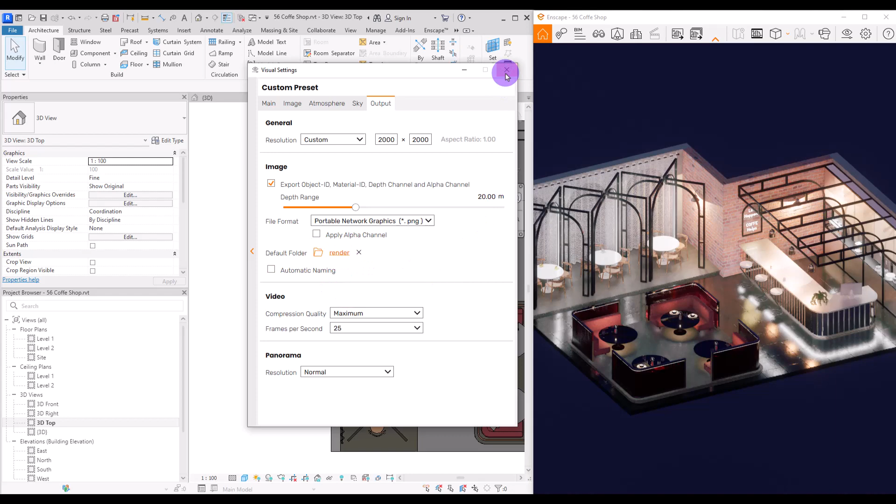Then check this box if you want object ID, material ID, and these. If you want the alpha channel of this render, check this box - you'll get nothing because we created that floor in this part. You'll be able to select that floor in object ID since it's an element here, but you won't have the alpha channel. If you want it before rendering, you need to hide or delete that floor, and after that check it. Choose a folder for your render, then press Shift and F11 and wait for your render.

The final result is much better than I thought, and I think it's awesome. So yes, that's it. I hope this was useful for you and you enjoyed watching this tutorial.